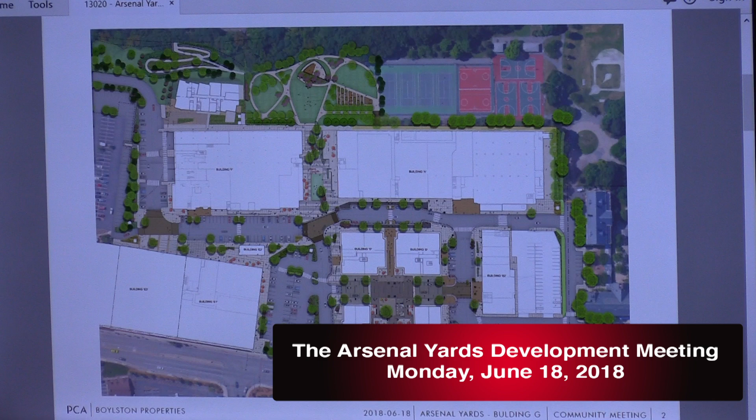We also announced our movie theater, a boutique theater with upscale recliners, 725 seats, 100% of which will be recliners, so it'll be a great movie experience. It's a little smaller, because we're building a neighborhood here, not just a shopping center. This is a real neighborhood, so we want to be careful of pedestrian and vehicular traffic. Typically a movie theater would be 14 screens and 2,000 seats; this is a smaller scale, and the operator we selected is really well versed in this kind of upscale presentation. We're really excited to have them as part of the project.

We also announced a couple of restaurants. CityWorks out of Chicago, a great player, kind of a gastro pub, better quality food and a great family experience. They do a terrific job. They have 7 units in the Chicago area; this is their first one on the East Coast. We're so excited to have them as part of the project as well.

We also announced Ulta, great for women's fragrance, health and beauty, etc. One of the hottest retailers in the country. We're happy to have them as part of the project. There'll be lots of others to come.

We did do a deal with Shake Shack, probably our one national restaurant at this stage, but the real desire is to find the best of the local chef-driven restaurants. We've created some amazing opportunities for restaurants, and that's the way these developments go today. They're less apparel-centric; there's more dining, entertainment, open space. It's far more today about the social experience than it is just pure commerce.

We've spent a lot of time creating some very cool restaurant locations in the middle of the two residential buildings. There's a very cool shared street, we call it, meant to have lots of cafe seating, and on the weekends we can close it off so we can have markets or acoustic music or things like that happen.

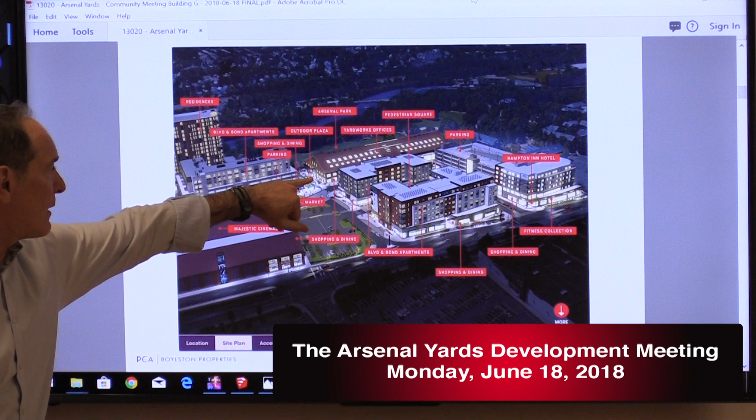We also created, one of our favorite areas, the courtyard - it's the river court that leads to the park. It's about 110 feet wide, and there'll be restaurants on either side. Actually, that's where Shake Shack is going, right here. We've talked to some great local restaurants for that corner space next to Roche Bros..

So we couldn't be more excited about the progress. The announcement was perfect timing. We announced just before we had our shopping center convention out in Las Vegas early in May. So the momentum has been terrific, and we're really pushing this summer to try to lock in some more of those key tenants.

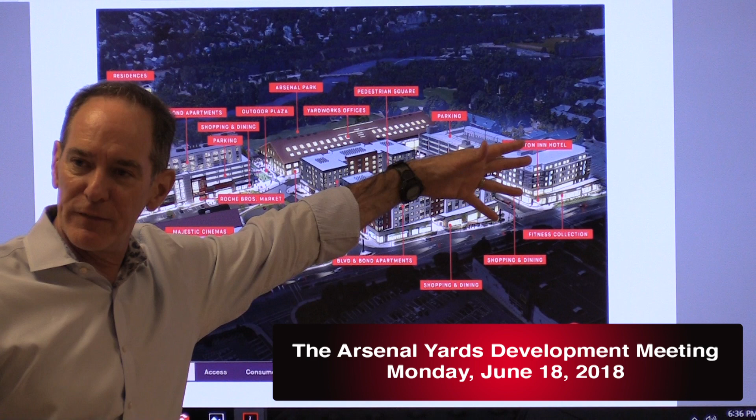We do have one other area that we're focusing on, and that's our fitness. We decided to do, instead of one large club, we're doing the studios. So we actually created another brand here called Fitness Collection. It's a collection of studios, so it'll have Pure Barre and spin and yoga and things like that.

So I think that's about the update for now. You'll probably see lots more announcements coming out over the summer. So thank you, I'll be around afterwards if anybody has any questions.

Thank you, Tom. For those of you who don't know who Boylston Properties is, I'd like to spend just a minute. Boylston Properties, Bill McQuillan started it 35 years ago, and almost 20 years ago bought their first project in Watertown. So they've been in the community since 1999.

134 Coolidge Ave, the Linx building across the way at 490 Arsenal Way, the Residence Inn Marriott across the street, and now the Arsenal Mall, which Boylston has owned for the last 5 years.

So why are we here? We're here tonight to talk about Building G. We're here tonight to talk about making Building G taller.

And we've given everybody who has come in a set of FAQs. We ran out — Celine is out making 15 additional copies, and I think this document will hopefully answer a lot of the questions you might have tonight. We're more than happy to answer them all again and talk about them in some more detail. But if you did not get a copy of these FAQs, when Celine comes back in with 15 more, we'll make sure everybody leaves tonight with this document.

So one thing I want to do is get you oriented. Unfortunately, our master plan and our floor plan are not in the same orientation. So you can see there, Building G is located here, behind Building F, next to the park. Down here is the river and Greenough Boulevard. Home Depot is over this way.

Okay, so that's the orientation of the building. And this is actually twisted, so now north is up, the river's down here. Everybody okay with that? Okay, good.

So this is a really important drawing because it tells the story of the reduced footprint of the building. Same size building, same gross square footage, same number of units, smaller footprint, and taller building. That's really key, because the approved plan is the red dotted line here, and it shows how it was kind of close to Building F, 24 feet. With the reconfigured building, now at the tightest point, we're 48 feet — basically twice as far from the building — which enables a lot more open space, pedestrian access, light and air.

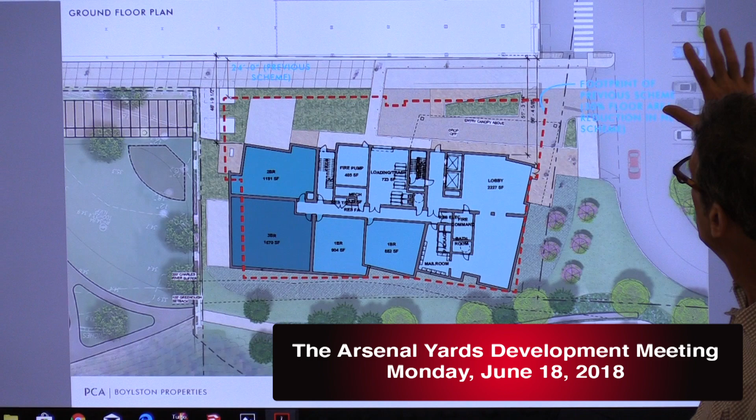And that's really the whole purpose of this: a taller building, more light and air for the pedestrians, a more inviting experience coming in from the parking lots, and a more inviting experience going through the park. So this drawing explains all of that reconfiguration.

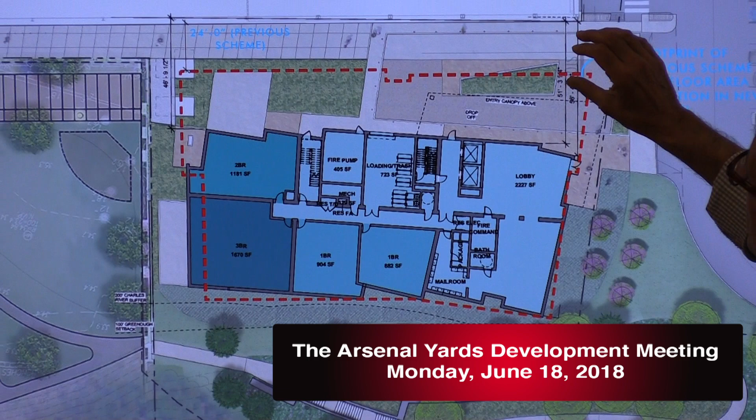Actually, let's go back one slide — something I want to talk about, which was the use of this space. When we were tight here, we really only had minimal access for service and fire truck access. Now that we're opening this up, this becomes a nice, pleasant entrance for the residential building here.

Vehicles can come in and turn back, and also a truck can turn in and get into this loading area. So it's much more generous, much more usable. This was kind of tight.

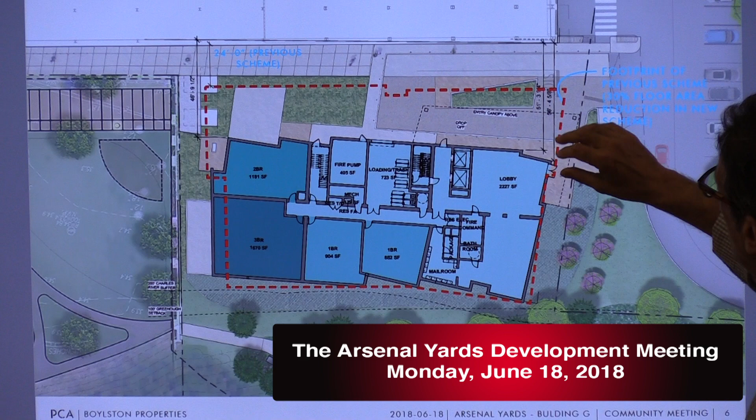We talked about when describing other buildings in this process during the master plan, this proportion of width to height, and a narrow space with tall buildings is not that inviting. So we really wanted to open this up and make this a much more usable area for the building.

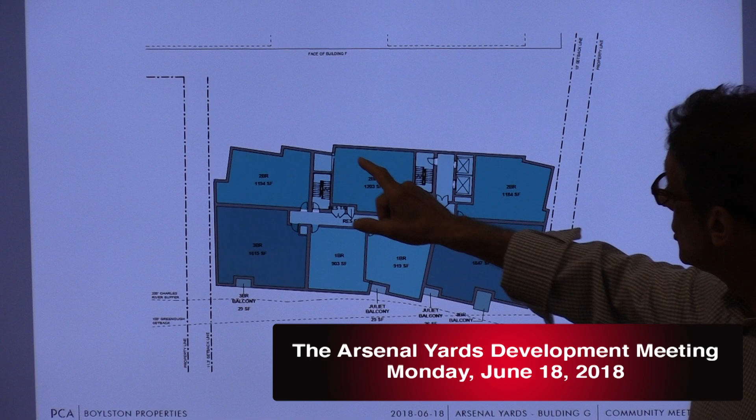So again, this is an upper floor. The way we've started to design this building is that we have the cores in the more unoccupied spaces facing building F, and so we have units ringing the bar. We have one unit that only has views of building F, but this enabled us to get most of the units facing out and getting great views.

Okay, so this is the approved building, the approved massing. It's a cool building, we designed it, but the proportions are kind of bulky still. I don't know if anybody goes to Washington, D.C., how often they have a zoning restriction of 10 stories because of the airport and because of the military. And Washington, D.C. has these blocky, chopped off buildings everywhere, just an uncomfortable proportion. This also shows how narrow it is in between building F. It's a little bit dark. Okay, next.

And so our new building not only has more light and air between the buildings, but we really believe that the proportions are much more elegant. It's a prettier building. The proportions are more vertical. And so we just think that this will be a benefit to the park, benefit to the community, having a little bit more of a prettier building there.

This shows it without the dotted line. So the other thing I wanted to talk about is, buildings are experienced by most people, pedestrians, at the ground floor. When you're walking by the building, you're experiencing 20 feet, 30 feet.

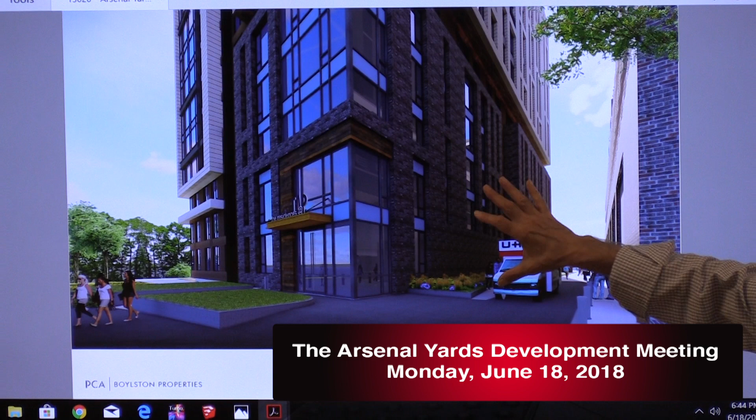This is a view looking toward the west. This building really indicates this was basically more of a service area. Now the building entrance is facing this way. And when we open it up, now it becomes a pedestrian area. It's a more inviting space. We could see that this could be spilling out some of the amenities. This could enliven and activate the plaza and the courtyard. More access through here. Just a nicer entrance.

This is a view we know people are probably interested in, from Greenough Boulevard. This is a view of the building peeking out above the trees. But again, with the lines of the building and the materials, we think it'll be a slender, pristine building just peeking out.

This is a view from Arsenal Street looking back. This is the approved design where you basically can't see building G over building F. And now you can just start to see it peeking out. The red line indicates the height of the previously approved design. From the park, you see again, this bulky form was the dotted line. Now we have a pretty elegant building.

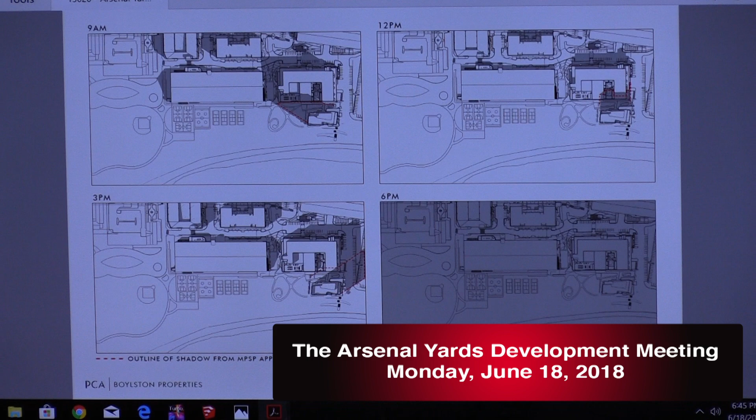Laura Porton has done the shadow study, so I'm going to let her talk about it in a bit more detail. Celine has come back in with more of these FAQs. If you don't have one, here's two. Anybody else? Okay, never mind, it's only one.

I also just wanted to make one additional point about the advantages of separating this building a bit further from building F. With the 24-foot separation we previously had, it required the north wall of building G to be much more opaque due to fire separation requirements. By pushing this to 46 feet, we're able to get a lot more glass and light in this 20-foot area that you experience as a pedestrian. So it makes for a lighter building at the ground plane, which wasn't possible in the scheme closer to what we refer to as the donut, which is currently approved.

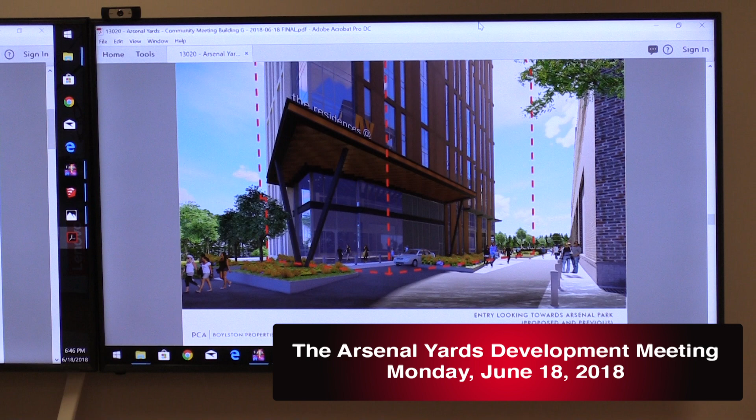So then, to quickly talk about shadows, bear with me while I try and work some magic on this computer.

I know this is probably a topic most people are very interested in. And interestingly enough, it's interesting to me - I don't know if it'll be interesting to you.

The building G proposal actually does not impose a bigger shadow footprint onto the park or public land, due to the fact that the footprint of the donut building was so massive. It created a shadow very similar to the taller proposed scheme. This is the equinox at 9 a.m. and 12 p.m. As the shadow moves, the red dashed line is the footprint of the approved donut scheme, and you can see the shadow of the taller scheme extends past it onto the Arsenal property, but is not a larger footprint than the donut scheme.

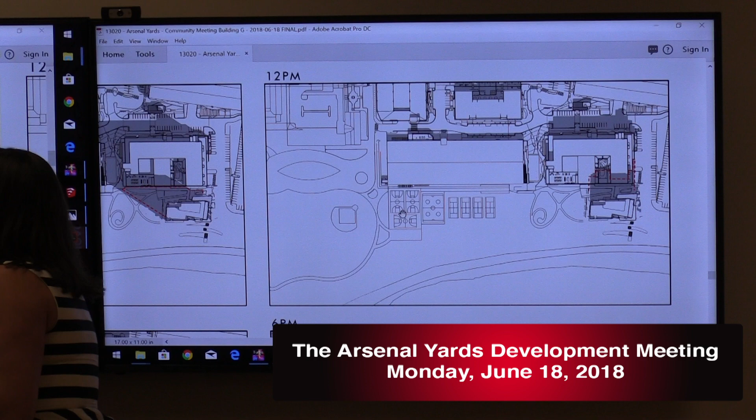One thing to note, it's a little hard to understand, but the height of building G stops short of building F. It does extend a little bit over in the taller scheme, but in general the proportions of the shadows are the same as they move across, and then once they get onto the Arsenal Yards property.

Could you explain what time of year and time of day? Yes, this is the equinox, March and September 21st, 9 a.m. and 12 p.m. The later ones are 3 p.m. and 6 p.m. We all know we live here, it's dark already.

But that comes into play in June when it's luckily not dark yet. So you can see as the shadow moves off of the park area, it only cuts a very small portion and is the same from the approved to the proposed.

June is slightly different. You can see here, this is June, this is 9 a.m. This is the difference, and this is the only time of year and only time of day that there is a difference between the shadows of the taller scheme versus the donut. As soon as you move into, I believe, 11 o'clock, you're already off of the park and onto this area.

The big thing to note is that throughout the year, the alleyway is completely in shadow with the approved scheme. The taller scheme allows us to get a lot more light into that alleyway in between the two buildings. So, didn't know if that was interesting to y'all, but it was very interesting to me when we did these studies.

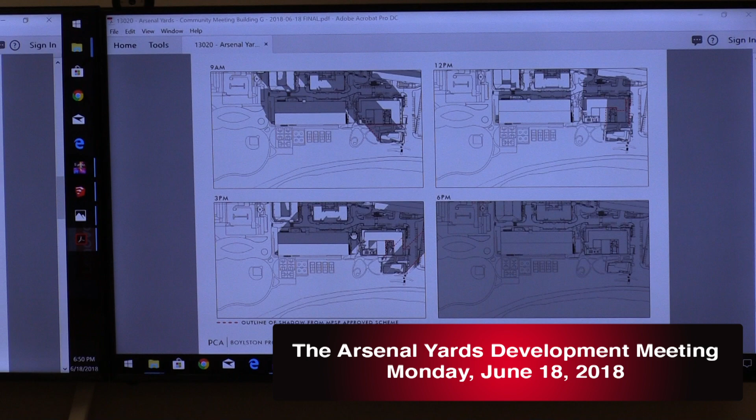And then finally, you can look at December. We typically take our shadows at March and September because they're the same time, and June and December to mark the different times of the year and see the impacts across the site. This is similar to the shadow study we showed for building F earlier.

And then Andrew, talking about the design guidelines: in an effort to... let me back up a little bit. So what we are showing you here is probably what's not going to get built.

And I say that because we are going to engage a condo developer to partner with us, and that condo developer is going to have a tremendous amount of input and say into what that exterior building looks like. But I think it's important for the purposes of understanding what 197 feet looks like versus what 130 feet looks like. We put some architecture to that building, and PCA has worked with us on shaping the building to fit the site and to be within the 200 foot riverfront setback and within our setbacks.

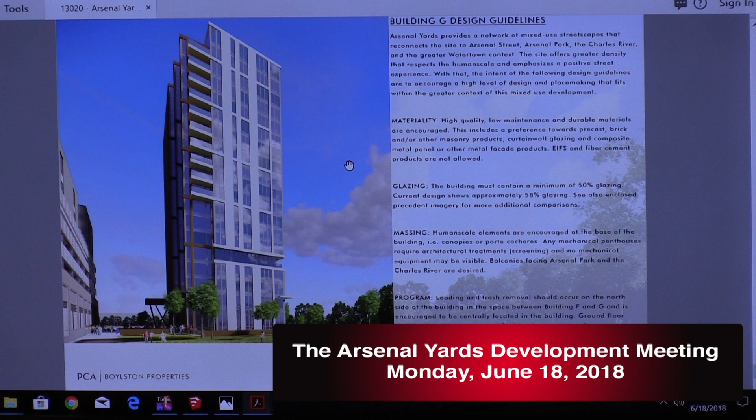Eric talked earlier about making this a better pedestrian connection. We think that connection to the park is important because we believe a lot of people coming to Arsenal Yards, or coming just to experience Arsenal Park, will take advantage of the parking that exists here. They're more than welcome to park in the F garage, or in the B2 garage, and access the park back here. We think this parking opportunity represents a great way to park here and get right into Arsenal Park, so creating this much wider pedestrian access point is an important part of the project.

So we created these FAQs. I'm sure we have eliminated just about every question you might have in the room. Thank you all for coming.

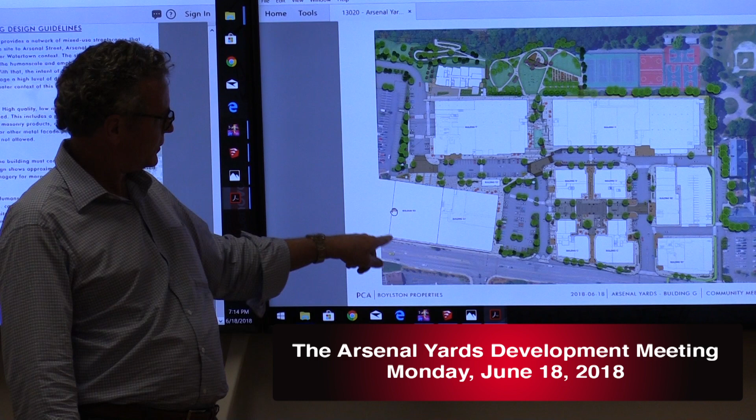Our plan involves taking down buildings from this historic building, which is Marshall's, right here, you're sitting in a room here. This was the old Navy, the old Gulf Town, Home Depot off here. So we had a big building in the process of being torn down here, and the underpass over to Home Depot, just to make sure you're oriented. We're tearing down all of that, and it'll be gone in a matter of a few more weeks.

One of the reasons we're tearing it down is that there's this fabulous park back there that's been unutilized. And our enlightened self-interest—I don't back away from self-interest—our enlightened self-interest is getting this park to be redone. Until we came along, that park was not being touched. And as of this day, the town still hasn't committed to a nickel being spent on that park.

So if you have complaints about this park and where it stands, you should talk to your town representatives. I'm not particularly happy that they haven't committed to what they're going to spend on this—I think it's 11 or 14 acres, a big park. But this area right in here, as Tom has pointed out, is a very public area on our land, and then opens up to this being redone. We're very proud of that, and that's very idealistic, sir.

Now, this is a taller building. We're going to argue for a few weeks or months about a taller building versus 130 feet versus 197. And Andrew, I would only correct you, it's not a little taller, it's 50% taller. There's no doubt about that—130, 197, that's 50% taller. We're not backing away from that. I said in meetings like this two years ago that I thought 130 feet was the wrong number, and that we were going to take a further look at it, but we were paying attention to lots of other things, and that we would come back if we thought a taller building made sense.